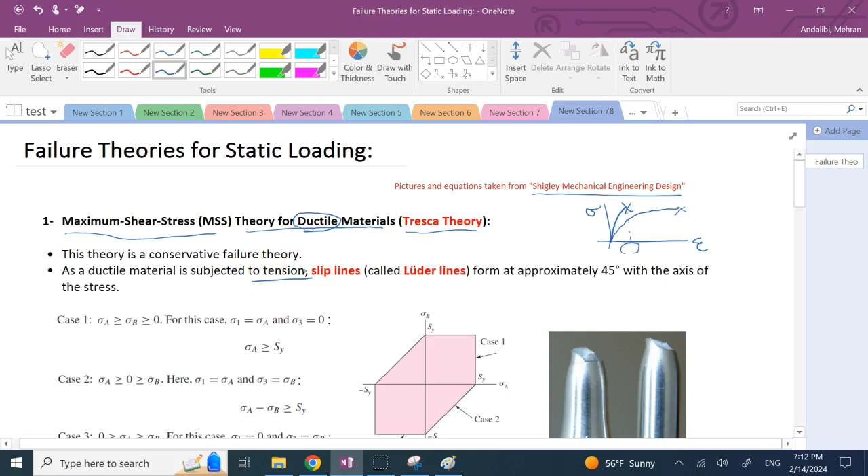For this material, it has been shown that when you put it under tension - if you have a specimen, a piece, shaft or dog bone or anything like that, and you apply tension on both sides and put it in a tension machine - you can see that the fracture lines, the angles, are at roughly 45 degrees, and the material starts to lose cross-section in the middle.

So it goes like this in the middle, as you can see here on this picture on the left. The two pieces, you clearly see that the cross-section is reduced here as you move toward the middle of the part. This phenomenon we call necking.

So the necking happens here, and the angle at which the maximum shear stress is occurring is 45 degrees. If you measure the angle of this line with respect to this direction, based on theory, based on the Mohr circle, this angle is going to be 45 degrees. Along that angle is what you see the slip lines, or you might call it the Lüder lines, which happen at that angle.

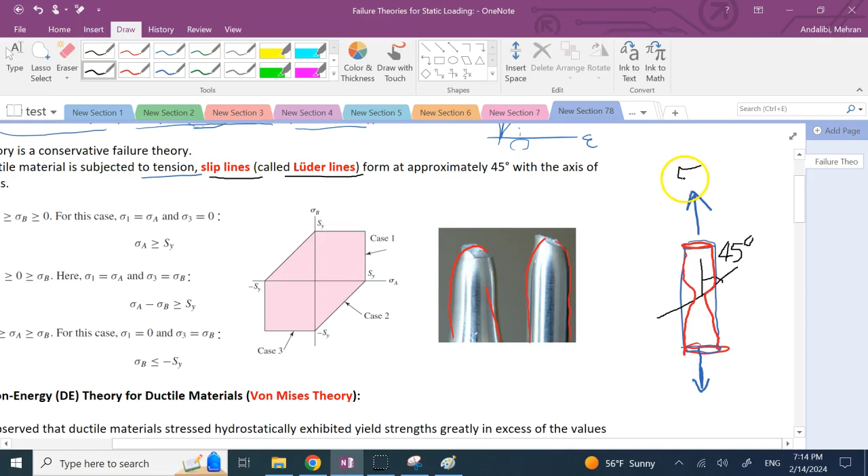And this is completely justifiable by the Mohr's circle. If you look at the Mohr circle, in the case where you basically have only sigma x, so it's uniaxial, that's all you have - there is just sigma x, nothing else.

If you draw this axis for sigma and this axis for tau, then you have one point here on this plane that is perpendicular to the x direction. You only have sigma x and zero tau, so you get this point. Sigma y is zero in this case, so sigma average is half of them. This is going to be the center of the circle, and the circle will basically be something like this.

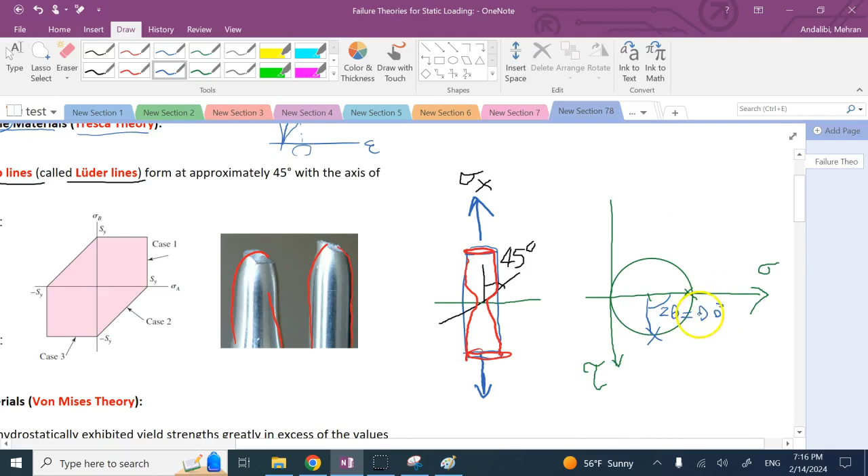And in this case, the maximum shear is of course happening on this plane, and the angle you have here is 90 degrees. But remember, in the Mohr circle, this angle is 2 times the angle of the major plane. So since that 2 theta is 90 degrees, the angle should be 45 degrees. So as I said, by Mohr circle, this is completely predictable.

And if we want to draw it in general based on the principal stress, what area is going to be the failure area and what area is going to be the safe area? The shape of the failure and safe region, if you look at the safe region, is going to be this hexagon, where the axes are sigma A and sigma B, the principal stresses on the plane. So this is for a planar case - these are all assuming 2D cases.

Okay, but for the sake of the Mohr circle, remember in general you have 3 sigmas: sigma A and sigma B, or sigma 1, sigma 2, and sigma 3. Here it assumes in scenario 1 that the 2 planar stresses, sigma A and sigma B, the max sigma and the min sigma, are both positive. So what are sigma A and sigma B?

In case of 2D, for the Mohr circle in general, let me show you on this graph. This is the sigma axis, and this is the tau axis, and this is the Mohr's circle. If you look at the 2D case, this point here on this side and this side are the min and the max for sigma. We assume the bigger one is sigma A, the smaller one is sigma B. So this is sigma A on the plane, and this is sigma B.

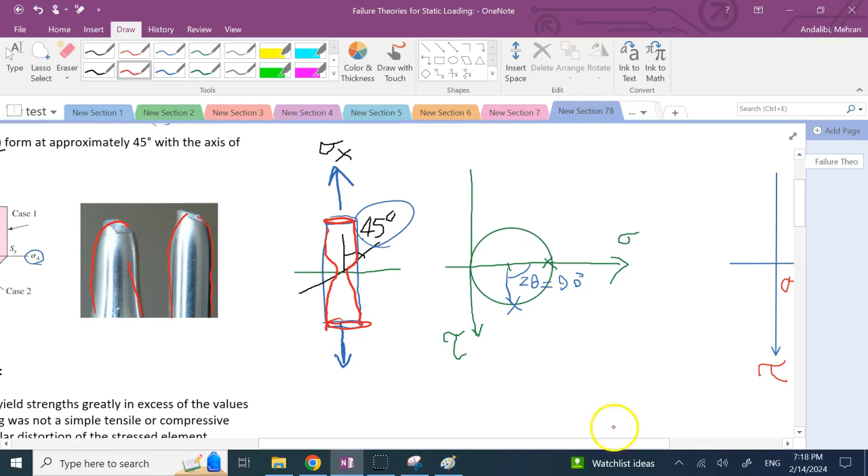And sigma 3, the third one, is 0 in this case. So your third one is going to be here. Therefore, the total Mohr circle, which is for the general 3D case, has sigma A as your sigma max, and 0 as your sigma min. The minimum is 0, and the maximum is equal to sigma A. In notation, I call them sigma 1 and sigma 3 instead of max and min. So your total Mohr circle should be passing through these 2 points, something like this.

So what is the maximum tau in this case? That's what you care about. Remember, in this method, failure would happen when the shear stress passes the maximum shear in the material. Let's add that here since we didn't specifically talk about it earlier.

This method says that failure happens when the max shear stress passes or exceeds the max shear strength of the material. So as long as the max shear stress passes the max shear strength of the material, you can expect failure.

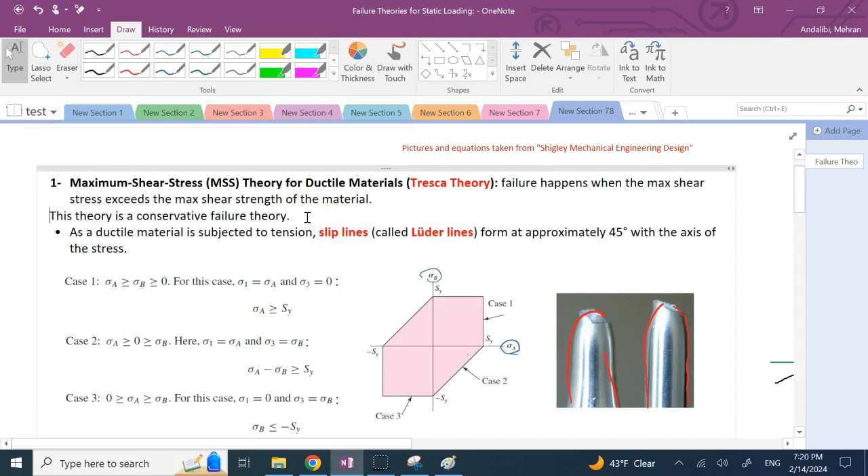So what is the max shear stress? What is the max shear strength? Let's look at those scenarios. The maximum shear stress is going to be the radius of the circle, which is the difference between sigma A and 0, or half of sigma A. So tau max is simply sigma A minus 0, divided by 2.

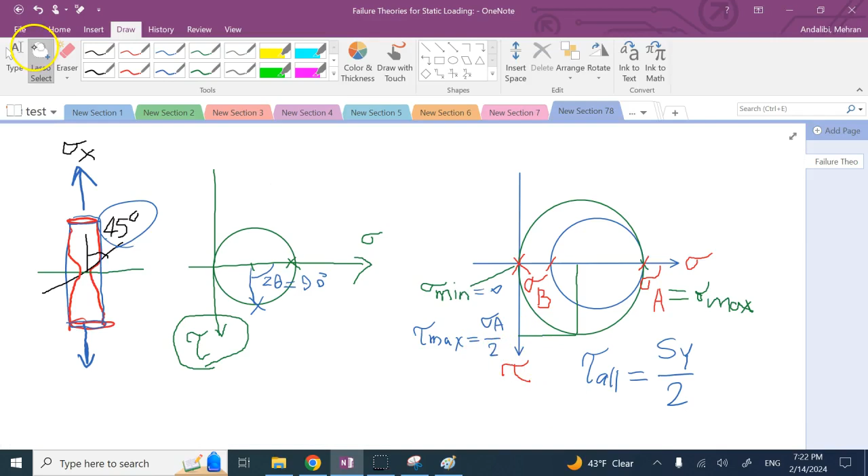Now, what is the shear strength? What is the maximum shear that the material can have? What is the tau allowed? This is equal to the yield strength of the material divided by 2. As long as this tau max is less than that strength, you should be good. So if this is less than that, you have no failure. And you can get rid of the 2's.

So you see sigma A, the maximum stress in the plane, should be less than the shear strength, the yield strength of the material. As long as sigma is less than Sy, there is no failure. Once sigma A exceeds or equals Sy, then it is failure.

And this is for the case that both planar stresses exist and they are both positive. If you draw this plot with sigma A on the x-axis and sigma B on the y-axis, that is the first quadrant. In the first quadrant, both numbers are positive, so the bigger one of the two, sigma A, should be less than Sy. If this number is Sy and this number is Sy, then if sigma A is bigger, sigma A less than Sy means to the left of this line, and if sigma B is bigger, sigma B less than Sy means below this horizontal line.

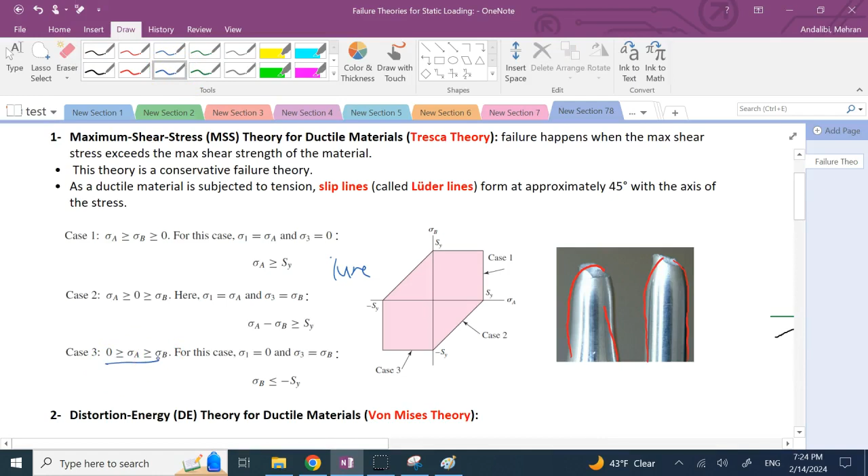Scenario 3 is similar to scenario 1. In this case, both of them are negative. Okay, in this case, your Mohr circle moves to the left. So instead of this here, now both of them are on this side. So one is here, and one is 0.

Okay, so this is 0. And in this case, it says sigma A is bigger than sigma B, but they are both negative. So your sigma A is here and your sigma B is here. So your Mohr circle, in this case, has to go like that. And again, your tau maximum, in this case, is equal to sigma B minus 0, or 0 minus sigma B, divided by 2.

Okay, and this is the tau max that you have, and again, this should be what? This should be less than or equal to Sy over 2, and from here you see that sigma B has to be basically bigger than negative Sy, right? For in magnitude, the magnitude of it is less than that, the value of it is bigger than that. So that is this scenario here, which you can see.

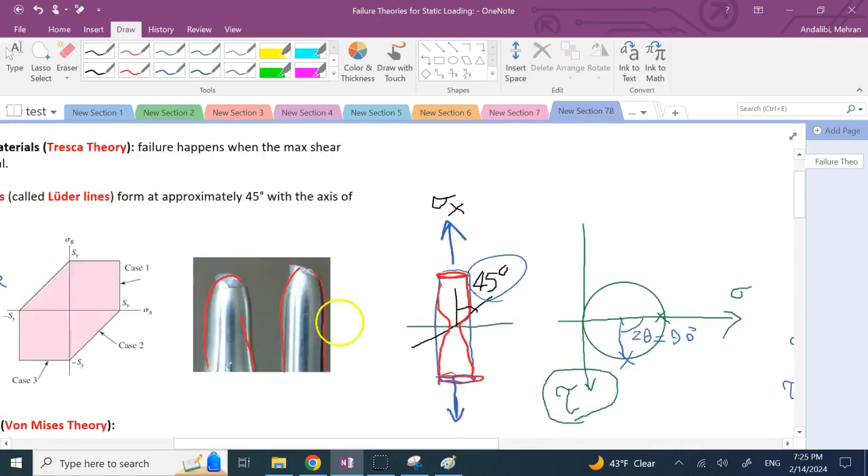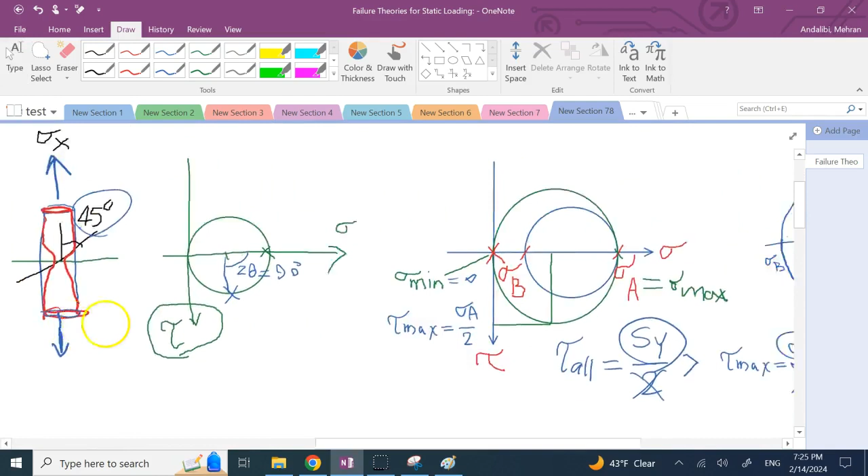Now failure is opposite of that. You can see again, if sigma B is less than negative Sy, which means basically on this side, so if this is negative Sy, if your sigma B is less than that, means here. If it's more than that, means to the right of it. Okay, so this is the, and we can use bigger than. This is the no failure case, and opposite of that is, which is what you can see here, that is the failure case again.

Right? So again, if you want to be safe, you have to be bigger than negative Sy. So for sigma B is above this line, for sigma A is to the right of this line, so that means this area here. So in the third quadrant, again, you stay inside the circle, inside the square. In the first quadrant, you stay inside the square.

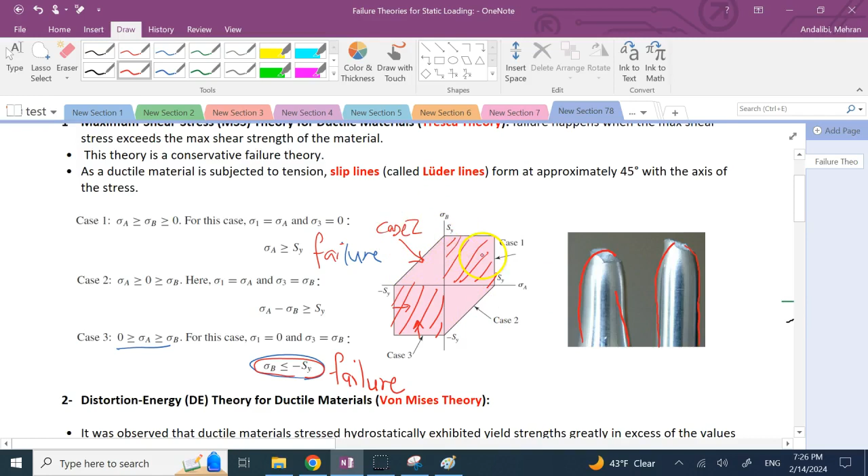Now, in case 2, which is either here or here, they are both case 2, in the second or the fourth quadrant, where the sign of sigma A and sigma B are different. So one of them is bigger than 0, the other one is less than 0. In this case, the Mohr circle is going to be like this. So your sigma A is here, your sigma B is here. And your third sigma is here, again 0 because it's a planar case. In this case, the Mohr circle is going to be like this.

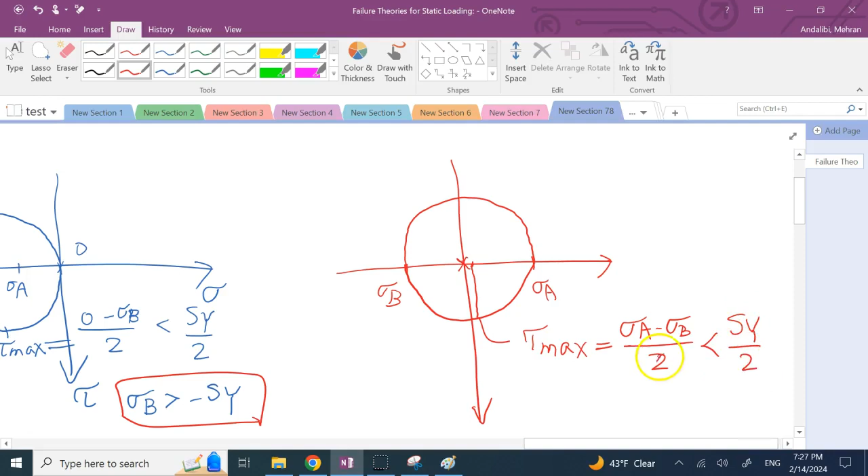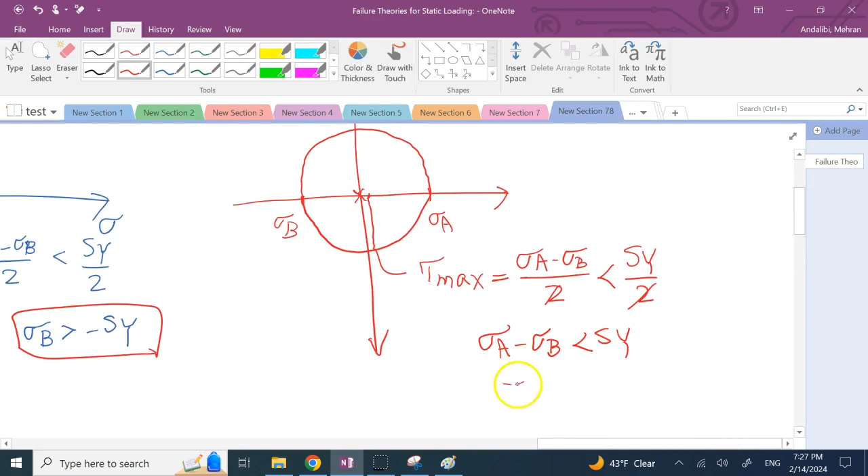And if this is the center of it, then this tau max in this case is sigma A minus sigma B divided by 2, which should be less than tau allowed. And tau allowed, if you remember, was Sy over 2. Again, if you get rid of this, you see that sigma A minus sigma B has to be less than Sy. And clearly, or you can say sigma A has to be less than sigma B plus Sy. And if it's equality, that's clearly the equation of a line with the slope of 1 in the sigma A, sigma B plane, with this guy to be your y-intercept or x-intercept in this case, right?

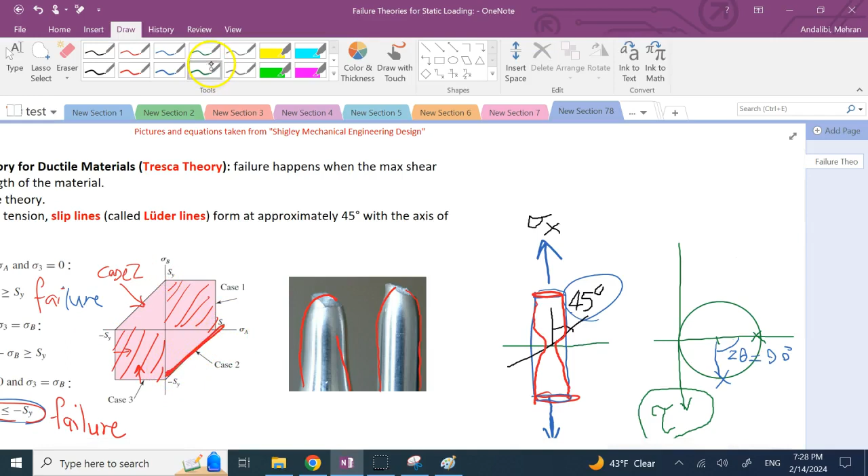So that is clearly this line. And when the sigma A and sigma B switch in terms of sign, or sorry, this guy, it's this one. And when sigma A becomes negative, sigma B becomes positive, then the only change is when these two switch, then this becomes sigma B minus sigma A. So this becomes like that, okay? And that changes the line to this one.

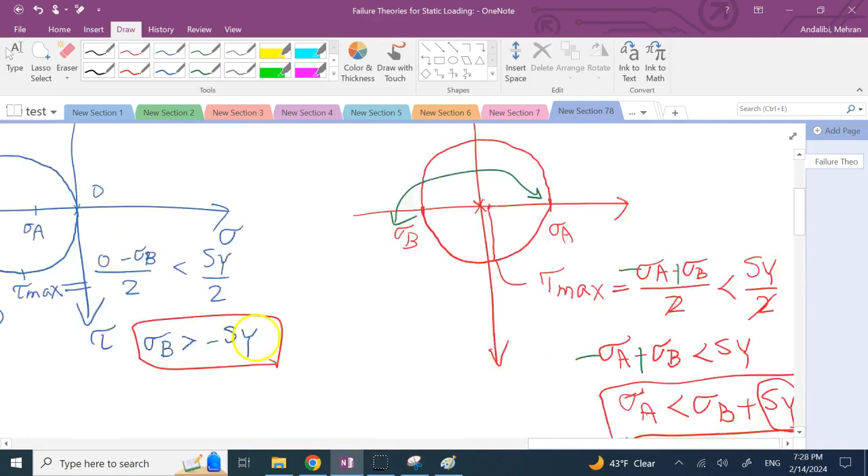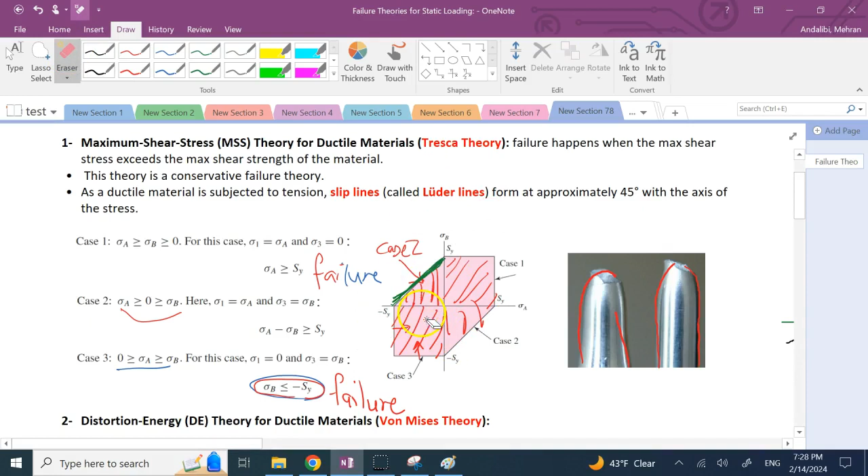So as long as you stay inside these shaded areas, this one and this one, you are safe. So you see, that's why the shape of the safe region in the Tresca method is this hexagon that you can see. Okay, this is what we call the maximum shear stress theory, or the Tresca theory. And that is based on the Mohr circle, which you can clearly see.

Now, this method is a conservative method. What does it mean? It means the value that it predicts, the safe region that it predicts for failure, is typically less than what it should be. Okay, the values of stress that it predicts failure happens, these regions are typically below the reality.

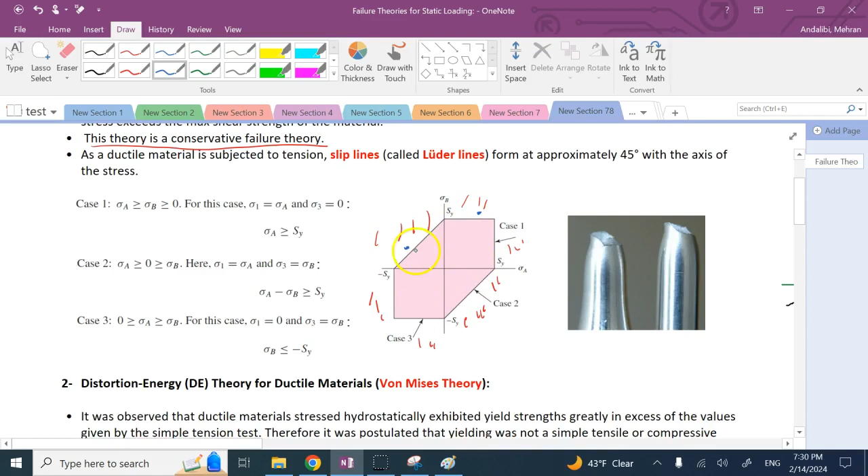What does that mean? It means that in reality, it was observed that there was a point of sigma A and sigma B outside this hexagon, which based on this method means failure, but in reality they found it didn't fail. There was a point where the status of the stress is outside this hexagon, so there should be failure, but they saw that the failure didn't happen. So they found that the fail-safe region this method gives you is smaller than reality.

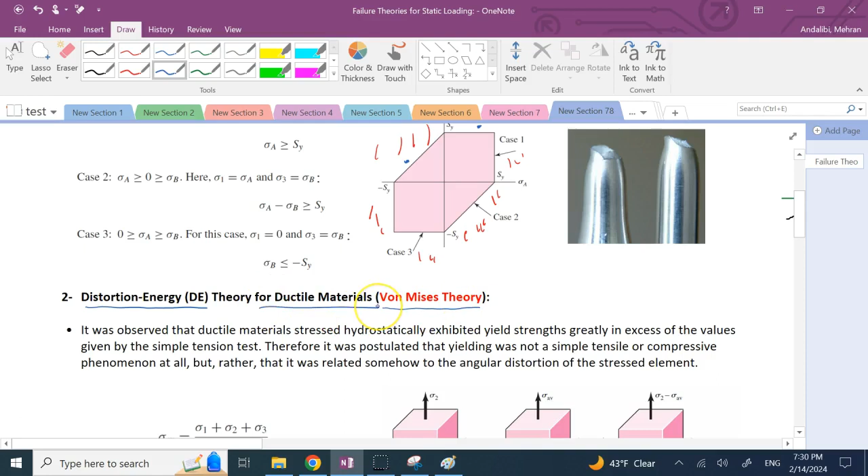In reality, even a little bit outside this hexagon, you still should be safe and no failure happens. That's where the second method, the distortion energy method, came into existence, which is also called the von Mises theory, and this is also for ductile material. What does this method say? Let's take a look at this observation.

One of the things also seen in this observation was, if you have ductile material and you stress them with hydrostatic stress, their yield strength was more than what it was in tension stress. What is hydrostatic? Hydrostatic means the stress in all three directions, x, y, z, is the same value. So if sigma x equals sigma y equals sigma z from all directions, then we call it hydrostatic.

What does it have to do with hydro and static? That's because if you have an object inside a fluid, water or something, and you drop an object inside of this, which is small, at all these different angles, as long as the dimension is small, all these pressures, P1, P2 and P3, are all similar and equal to rho GH plus P0. This is the static pressure of a fluid at depth H below the surface of the fluid. So inside any fluid in a static scenario, at a specific depth, the values at different faces of any element are the same. That's why we call it hydrostatic.

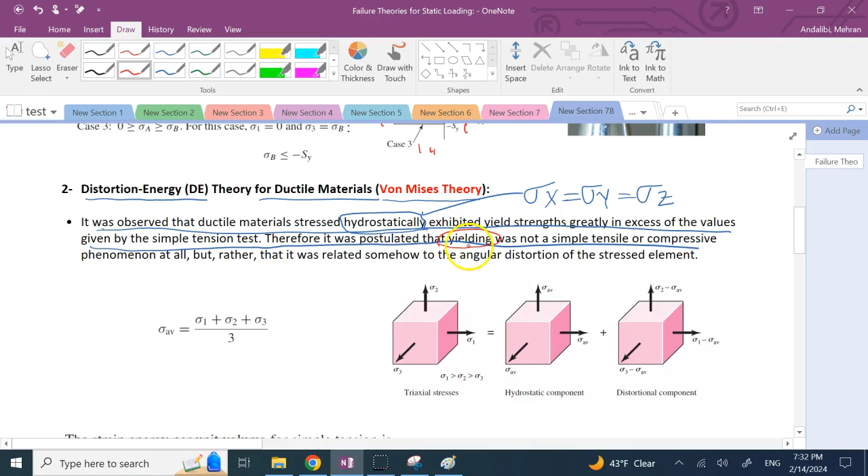Now, what was the conclusion from this? The conclusion was that not only is hydrostatic stress not messing up the shape of the object, it actually made the yielding happen outside this region. So when there was a hydrostatic case, I could have failures outside the Tresca region. So this method says it's not the hydrostatic component of a stress that has any effect on the failure. It's the other portion of the stress that causes the material to fail.

What is the other portion? If you consider any arbitrary element of the material with 3 sigmas on 3 faces, sigma 1, sigma 2, and sigma 3, not equal to each other, you can say this is equivalent to one case of hydrostatic where you have sigma average, defined by the average of the 3, applied to the element, plus the case that the stress on the other faces are sigma 1, sigma 2, and sigma 3 all minus average. You can do superposition here, saying the one on the left equals the sum of these two on the right. Now what's the effect of each one of these stresses?

This hydrostatic part is a tension stress all in the same direction, so the effect of this is resizing. This will make the material get either bigger or smaller, or change in volume. So if all the stresses are positive, the material will expand in volume. If they are all negative, compressive, the material would shrink. Like underwater, they are all negative, so the material can shrink if it's really flexible.

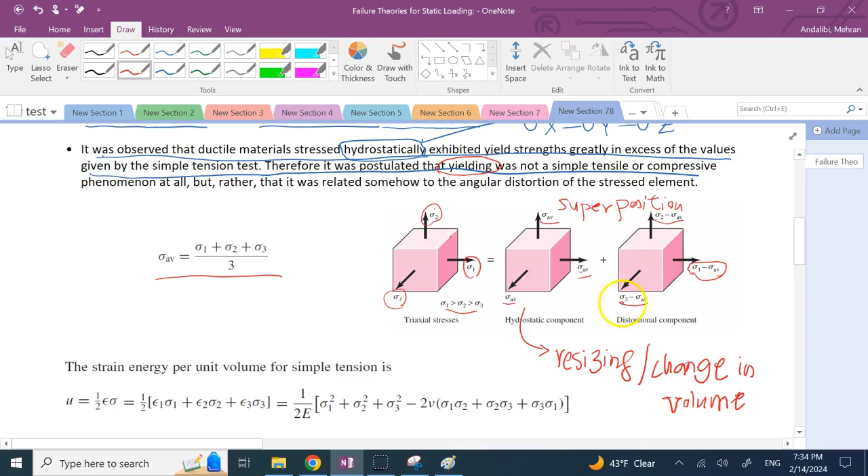What is the effect of these remaining stresses? They will cause shear in the material, or change in angles.

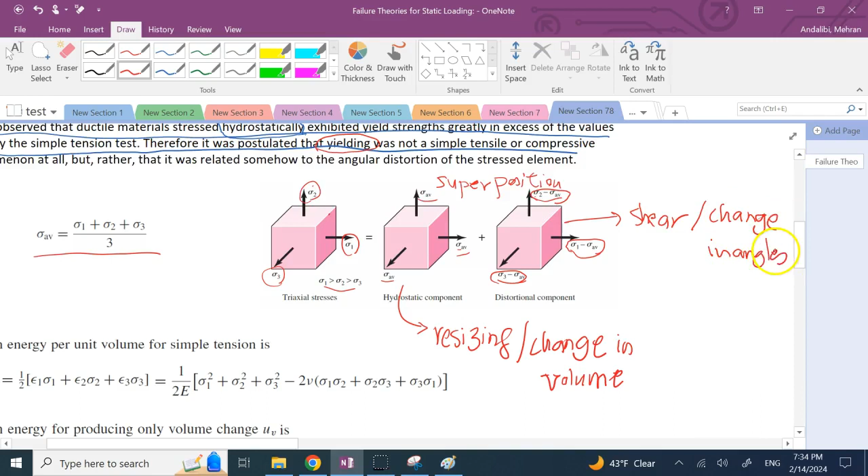So instead of making this cube a smaller cube, as we had in the previous case of hydrostatic, here they can't make it smaller or bigger. In this case, they're going to ruin the angles. They can change the angles and create shear stress.

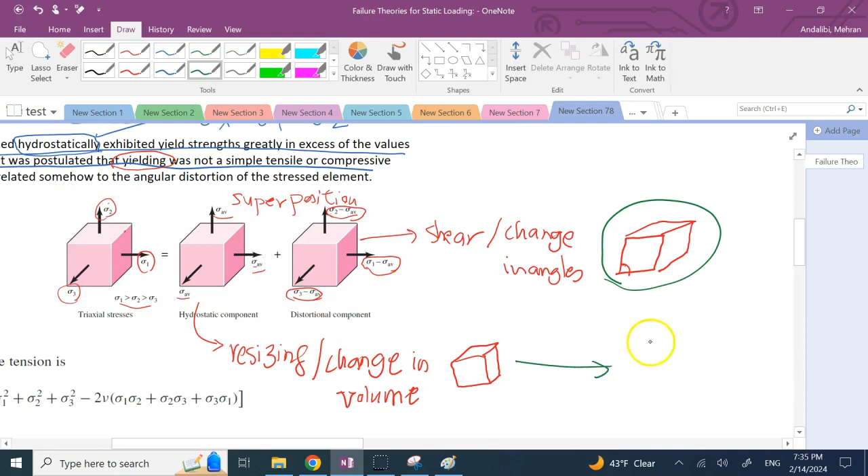But how big should these shear stresses or the deformations be before the material fails? In the previous case, it was simple. We said when the max shear stress exceeds the max shear strength of the material. But what about this case? What does this method say? It says that...

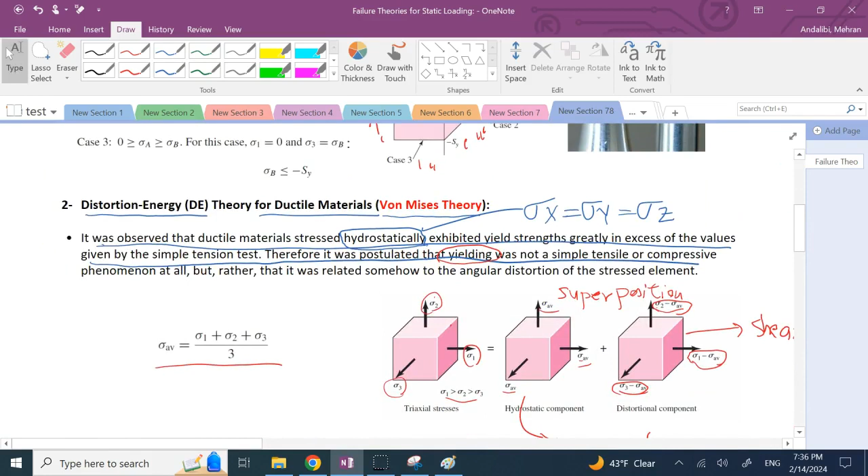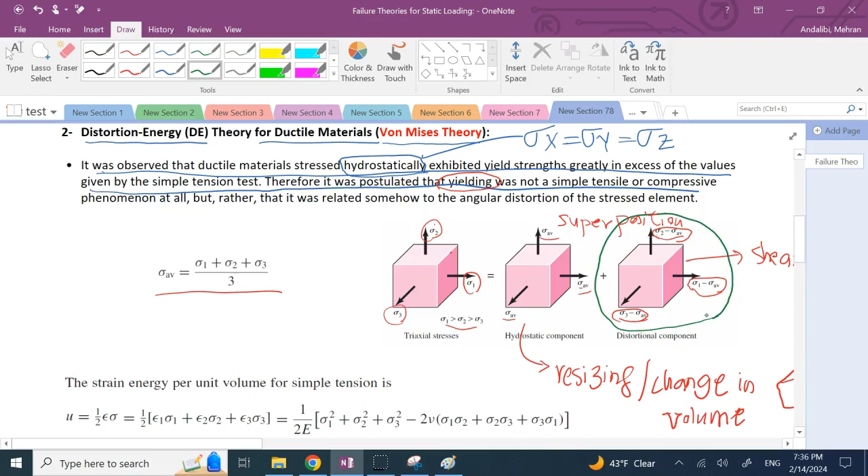We calculate energy. We calculate the distortion energy for this scenario, to see how much distortion energy this one will have. Then we compare it against a uniaxial case, like this case here, when the material is under uniaxial stress. We calculate how much distortion energy this case has until it reaches the yield strength. Then we compare and set those two distortion energies equal for this uniaxial case and this general 3D case, the same, and from there we should be able to find a formula for failure. So let's see how this method works.

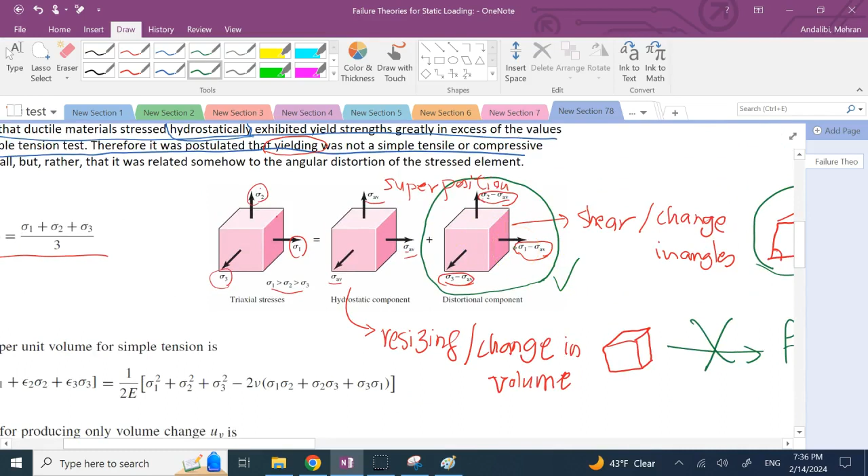It calculates the strain energy, the energy of distortion, per volume for a simple tension. If you only have a simple tension, it is going to be 1/2 epsilon times sigma, and again it's per volume. So this is the total energy per volume of the material. You can show that it is 1/2 times epsilon, this is epsilon, times sigma.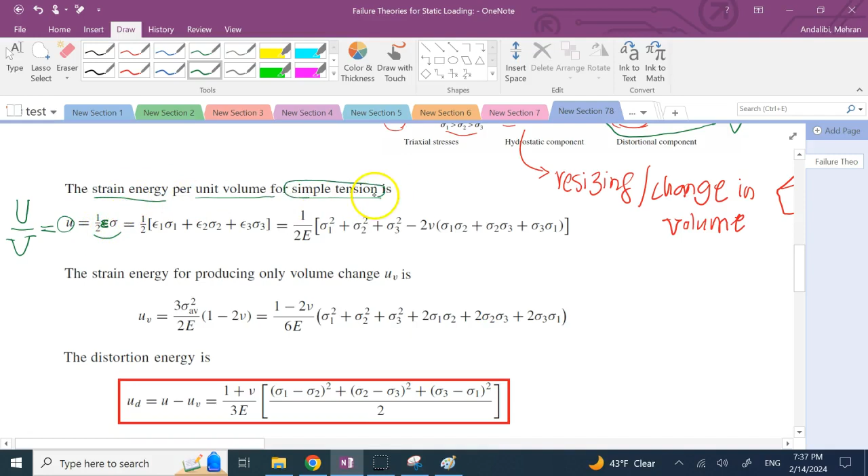This is for a simple tension case, right? It's this guy here, 1/2 epsilon sigma. Now if it's three-dimensional, so you have sigma 1, sigma 2, and sigma 3, this one is for the 3D case, then it is going to be 1/2 times epsilon 1 sigma 1 plus epsilon 2 sigma 2 plus epsilon 3 sigma 3, right?

And you know that these epsilons are related to the sigmas through what you know from solid mechanics. You know that, for instance, epsilon 1 is sigma 1 over E minus nu times sigma 2 and 3 added, so it's going to be sigma 2 over E plus sigma 3 over E, where this nu is the Poisson ratio and this E is the Young's modulus, right?

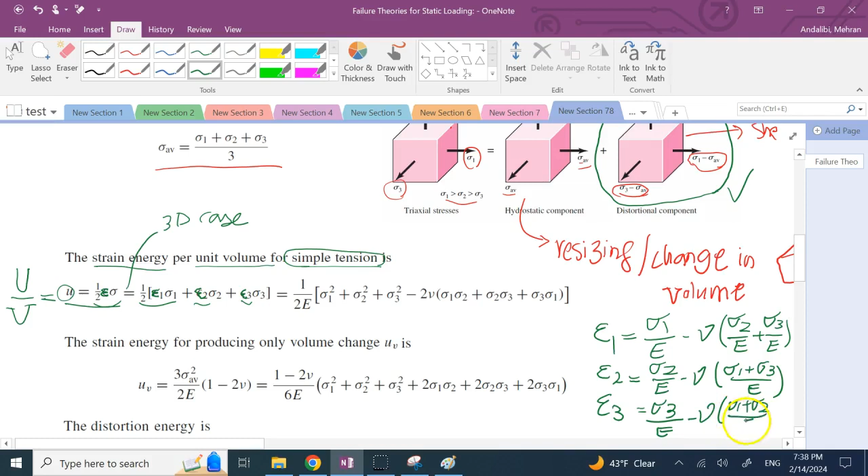And similarly you can write a similar formula for epsilon 2 and a similar formula for epsilon 3. So this guy is like sigma 2 over E minus nu times sigma 1 plus sigma 3 over E, and this one is like sigma 3 over E minus nu times sigma 1 plus sigma 2 over E. So if we plug in these three right up here and simplify, you get this term here on the right.

You get this guy. You can easily show that. And clearly you see nu is there, E is there, and all the principal stresses. So this formula is the total strain energy for the 3D case. But not all of this energy, as we learned, is used for shear. Some portion of it is the energy just for resizing. The rest of it is the energy for what?

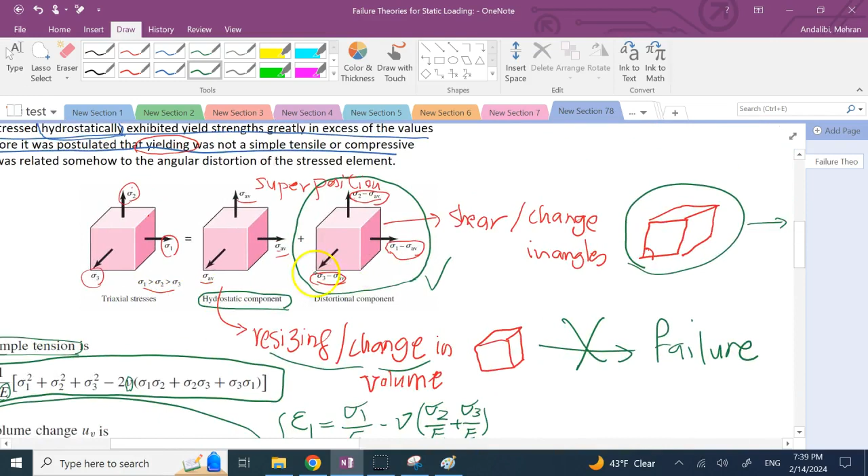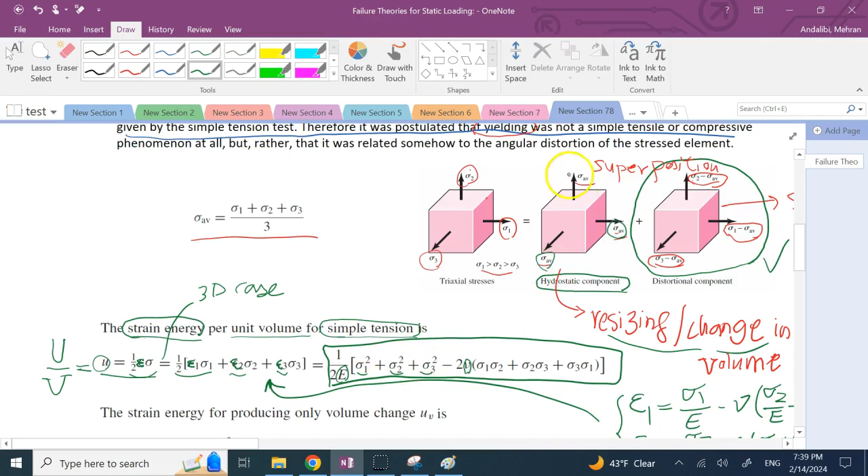For distortion. So how much of it is the energy for hydrostatic resizing? Well, in that case, we have to set all three sigma 1, 2, 3 to be equal to sigma average, which is this guy. If we plug that in, then for change in volume you get this formula here. So here we plug in sigma 1 equal to sigma 2 equal to sigma 3 equal to sigma average. You get that one, and if you plug in this formula for sigma average, you get this guy.

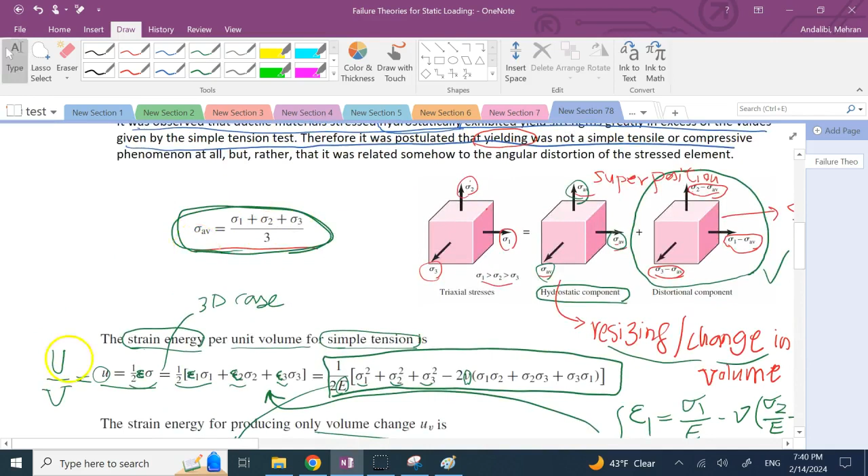Now that was the total strain energy. If I subtract this UV from U, then you get U distortion. So you get the strain energy for the shear case, and that is basically the first line minus the second line, and you get this. So this is the total distortion energy per volume, which is only for shear, only for distortion.

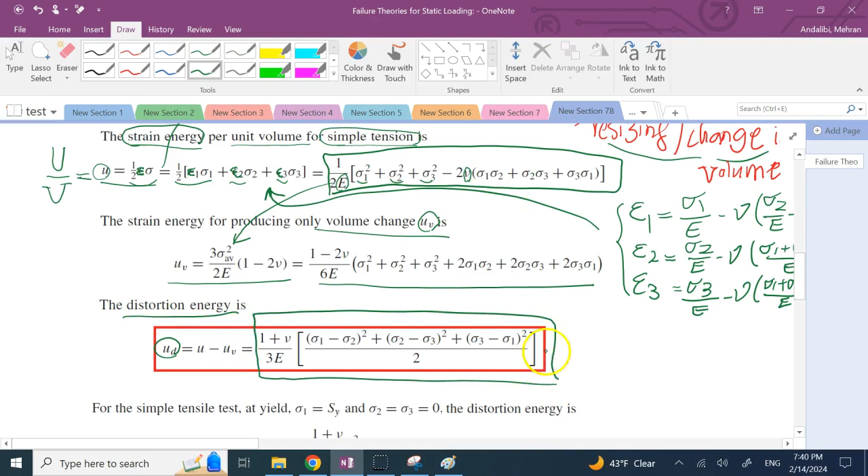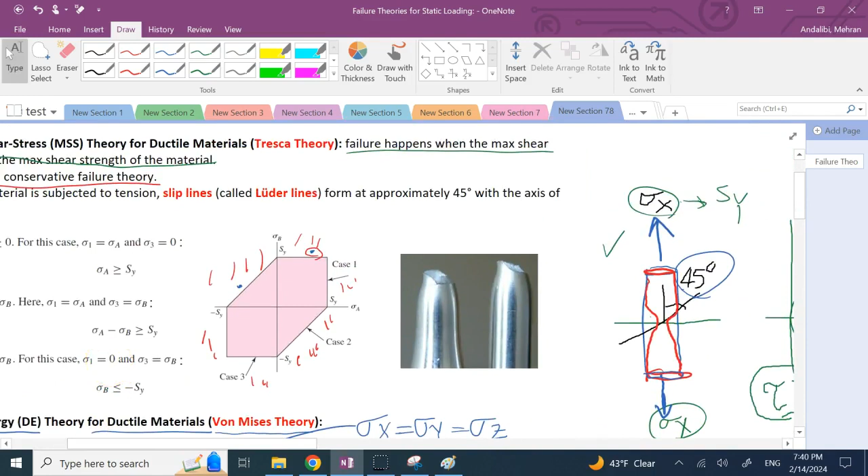Now we have to go and look at the single uniaxial case here and see for this uniaxial case, where sigma can go up to Sy, how much is the strain energy, how much is the distortion strain energy. So in that case, sigma 1 is equal to Sy, as we said it can go up to Sy. Sigma 2 and 3 are 0 because it's uniaxial. So if we plug sigma 2 equal 3 equal 0 and sigma 1 equal Sy into this UD formula, you get this.

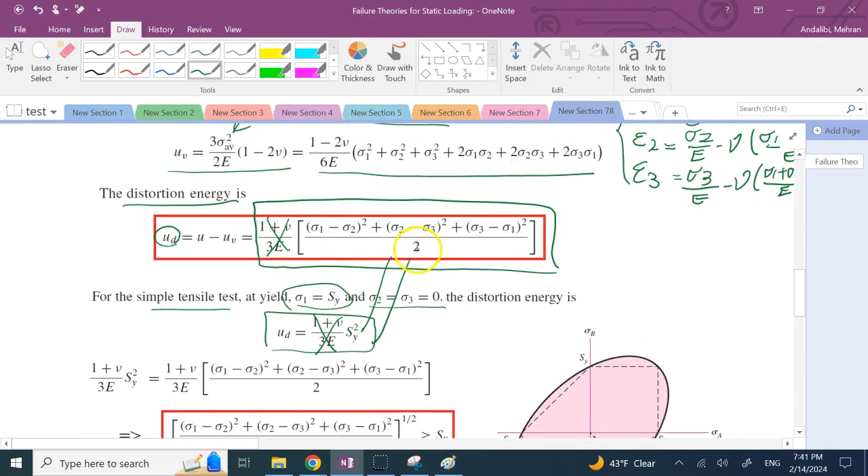Okay, now if we say these two strain distortion energies are equal, then the constant term in both of them can be eliminated, and you get this formula. You divide both sides, take a square root from both sides, and you get this formula, which says: as long as this square root of sigma 1 minus 2 squared plus 2 minus 3 squared plus 3 minus 1 squared, the whole thing divided by 2 - if this square root is bigger than or equal to Sy, that means failure. And if it's less than Sy, then it means no failure, or safe.

By the way, this whole square root thing, we can give it a notation. We typically call it sigma prime, or sigma Mises. So another notation for this is sigma Mises, and this is what you see in many software packages that do finite element analysis. One of the major stresses you see in them is the Mises stress - that is this square root calculated for you. So first they calculate all three sigmas, sigma 1, 2, 3, from the Mohr circle, the principal stresses, and then plug them here to get one equivalent number. Because here we have three sigmas, we cannot compare each one of those three sigmas with SY.

We have to combine them into a single number, then compare it against SY, and this is what Professor von Mises came up with. Now, in the sigma A, sigma B plane, clearly that's an ellipse. Why? Because in this case sigma 3 is 0, so it's a 2D case. So if sigma 3 is 0, what would you get? The equation becomes, as you can see, sigma 1 minus 2 squared plus sigma 2 squared plus sigma 1 squared, basically. Or if you write it, it's going to be 2 sigma 1 squared plus 2 sigma 2 squared minus 2 sigma 1 sigma 2, divided by 2.

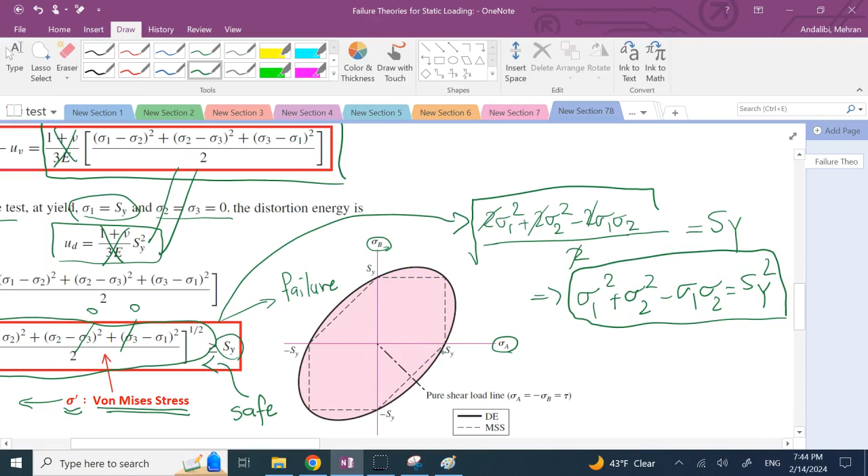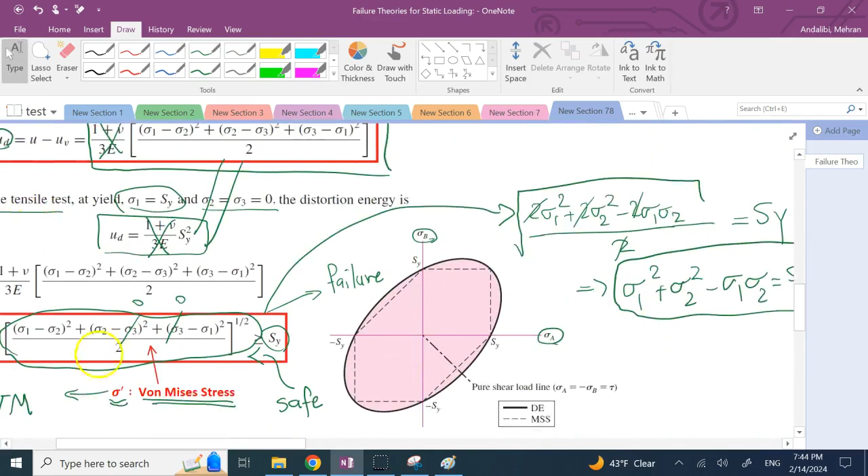An interesting thing about this ellipse is that if you draw the Tresca region, that hexagon of Tresca, it falls right inside this ellipse, with the corners of it, which are SY and negative SY, being right on the boundary of the ellipse. So this method says not only is inside Tresca safe, actually all of these regions that I'm going to paint in blue are also safe, because these are the regions where the strain energy does not surpass the one for failure, since a portion of it is used just for changing the volume of the material, and not all of it is used for distortion and shear.

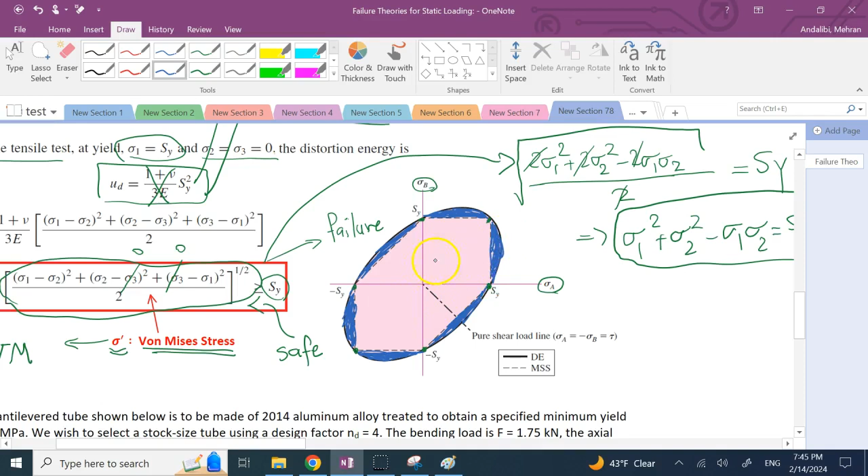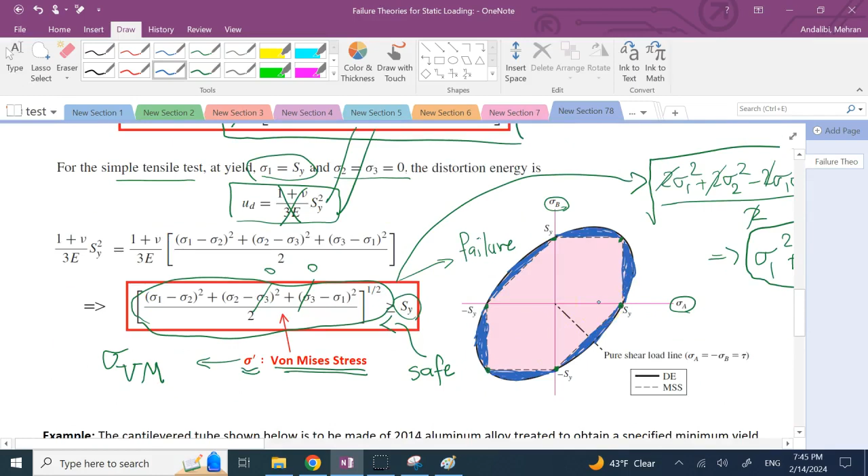So the Tresca gives you a smaller region compared to the von Mises. That's why we call the Tresca method a conservative one, because it does not allow too much motion outside this hexagon, but von Mises gives us a little bit more wiggle room. So this was the von Mises stress, or the distortion energy.

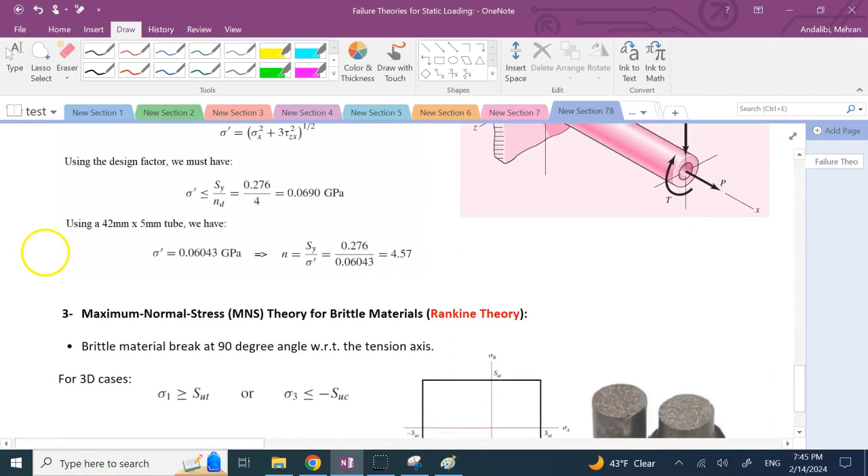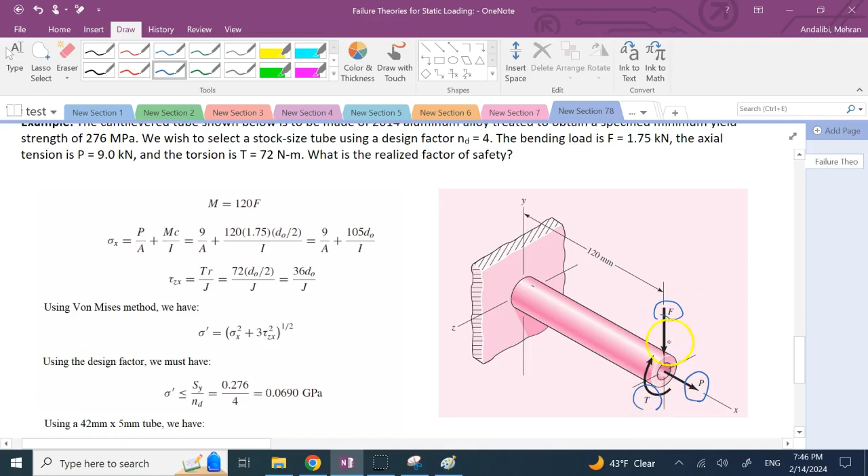Finally, let's go to an example before we look at maximum normal stress. So here we have a cantilevered beam, a shaft which is hollow, and there are three forces on it: a bending force F, or shear bending, an axial force P, and a torque T. So each one of them creates a stress, and it is a combined stress scenario. The values are given - F is given, the axial load is given, the torque is given - and we want to pick a geometry, a size for this, where the material is pre-selected: it is 2014 aluminum alloy.

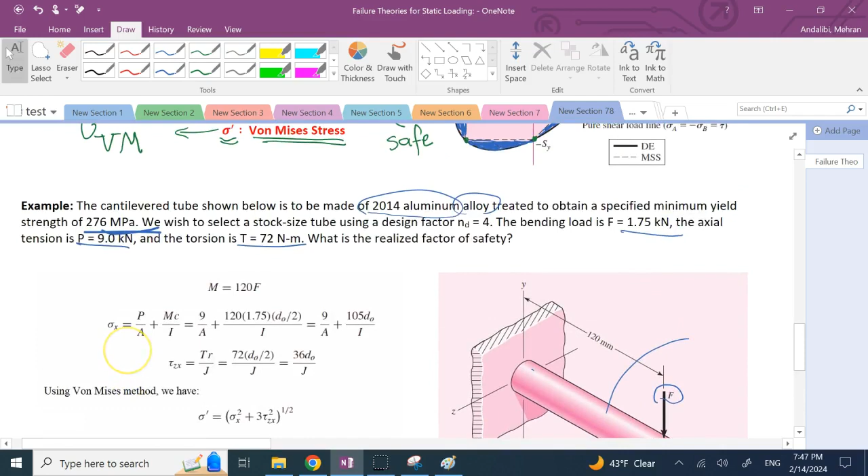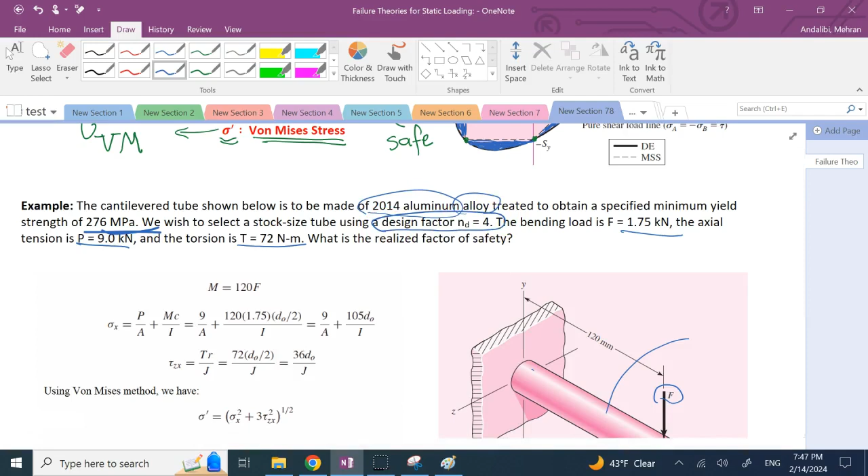Okay, and the yield strength of this material, SY, is already given, 276 megapascal. So what you need to pick here is the geometry, and you're going to pick it from the tables, because these kinds of tubes are specifically picked from standard tubes, circular tubes, and you want to use a safety factor of 4 at minimum. So what is the geometry that you would pick? Okay, let's go ahead and work on this problem.

As I said, we're going to pick this from standard size tubes, and here I copied the table from the book. You can see these are standard tubes, and the dimensions for them are given in inches, right?

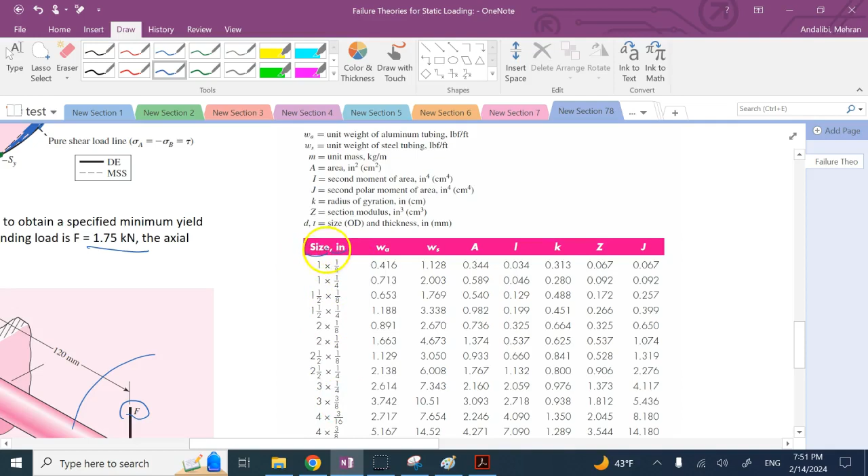This dimension, you say 1 by 1/8. What does it mean? It means that 1 inch, as you know, is 25 millimeters. So the properties here you have are: one is the cross section in inches squared. That's one, and the other two you might need for the stress case are I and J, the second moment of area and the polar moment, as you can see, this one and this one. And then you of course have unit weight of aluminum or steel tubing, so if it's aluminum, that's this one. You also have Z, which is the section modulus. So you have these different parameters here, and K is radius of gyration, which is related to I here.

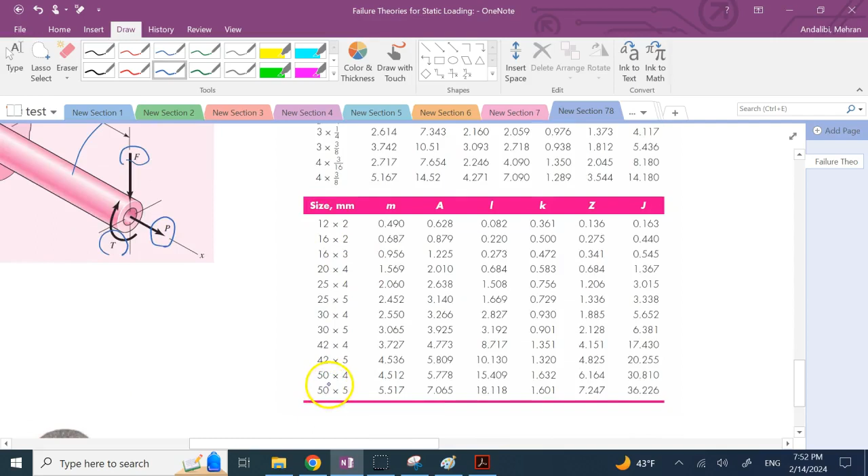Okay, so we're going to pick one of these. The top one is for inches, these bottom ones in millimeters, right? So you have these parameters, and we're going to pick one of these. Now, this is all in SI units, so I will try to pick one from this bottom side here.

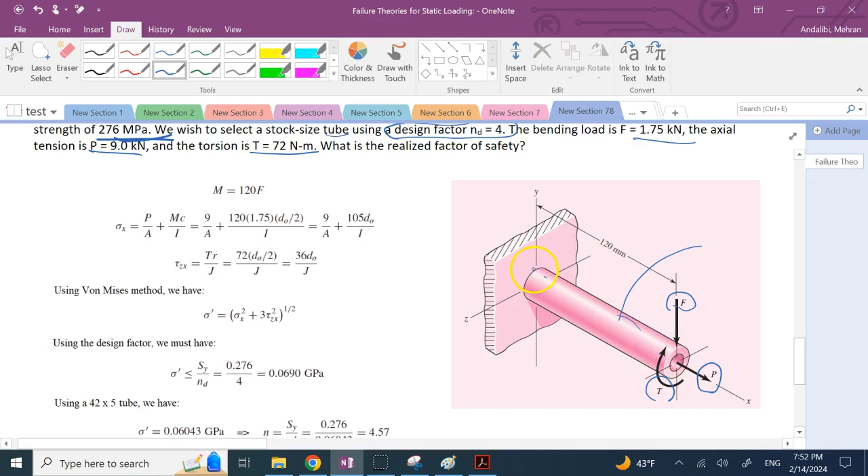So how much is M? M, of course, changes along this shaft, but the maximum M you can possibly have is at this cantilever location, at this fixed point, and that is F times 120. The unit of F is kilonewton, and this is millimeter, so when you multiply, you simply get Newton meter. So the unit of this is Newton meter, so it's 120 times F. That is the maximum moment that you can have.

Why would you pick maximum moment? Because that will give us the maximum bending stress. So what is sigma x in this case?

Sigma x is going to be a tensile stress, which is P over A, where A is the cross section, P over A plus what? MC over I. What is I? I is the moment about this axis, this Z axis, so this is IZZ, right, because the moment is about that. And C is the maximum radial distance or maximum vertical distance from that. So in this case, this C is simply the outer diameter DO divided by 2.

And here at this top point, you have positive sigma bending. At this bottom point, you have negative sigma bending. And the tensile stress in both cases is just positive. So the maximum stress is on this top point where these two positive sigmas are added together.

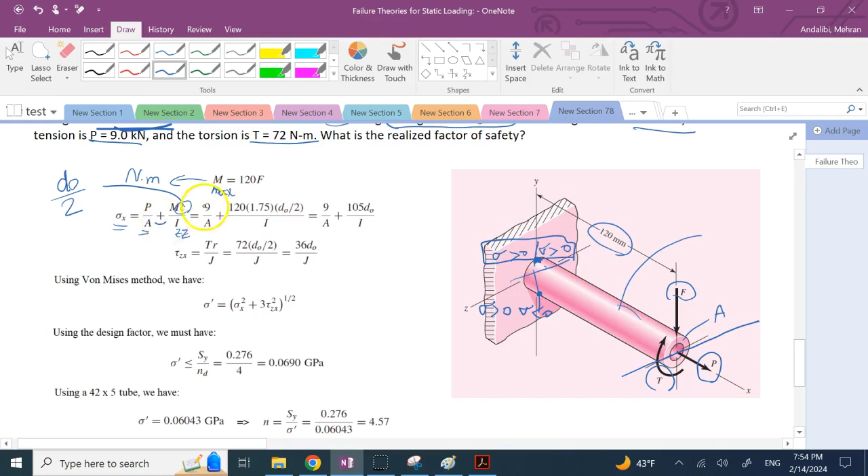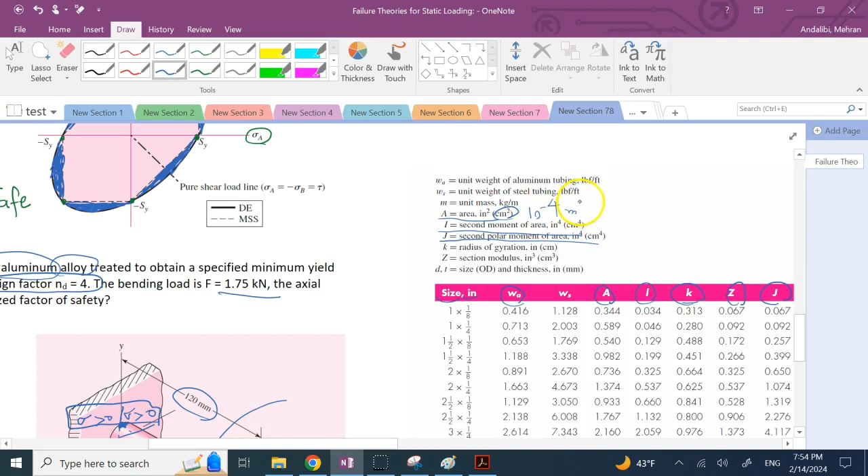Now P is 9 in this case, and again the unit is kilonewton. And the unit of A, if you look at that, is centimeters squared, right, which is basically 10 to the negative 4 meters squared. Pay attention that this is kilonewton, so the unit of that is 10 to the 7. And here you have MC over I.

So this is M, 120 times 1.75, because F is 1.75, and as I said, maximum C is DO over 2, and I here is that IZZ, which you can read off of the table. So if you write it parametrically, this is the maximum sigma x that you can have anywhere on this tube based on a parameter A, parameter DO, and parameter I. This is the maximum sigma that can happen anywhere on this shaft.

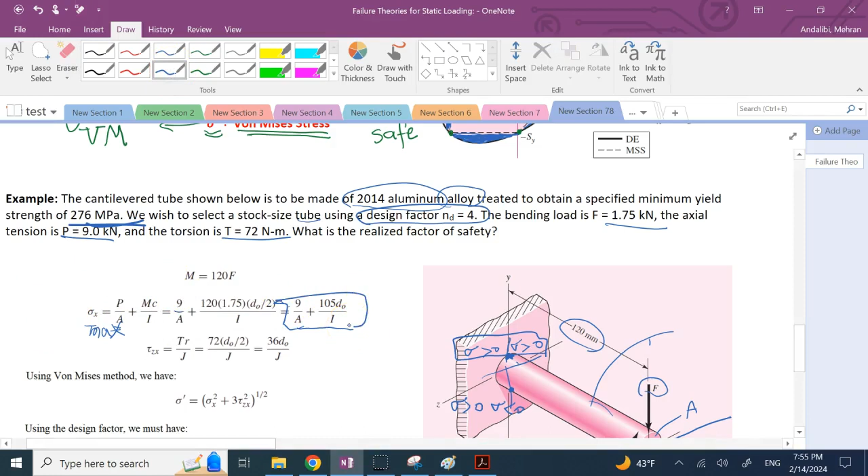What about the shear stress? The shear stress comes from T as well as F, but in this case, the shear stress due to F is neglected.

Okay, if you have this, you have to find the shear diagram, find where the shear diagram is maximum, which in this case doesn't matter. Anywhere you cut, the shear force is equal to F, and you also need to find the shear stress due to F as well as the one due to torsion.

But here the portion of the shear stress due to F is neglected. Why is that? If you remember the formula for shear stress because of the shear force, that was V times Q over I times T. V is the shear force, equal to F all over the beam, and this was maximum along this axis. So the maximum of that tau happens here on this axis.

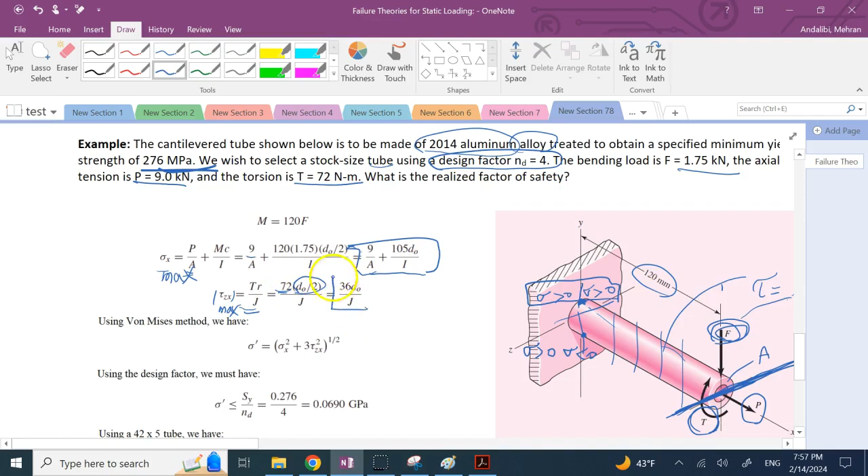The maximum shear stress due to torsion, if you remember, is TR over J, where R is the radial distance, T is the torque, J is the polar moment. The maximum of that happens at maximum R, which is D over 2, T is 72, J is given from the table. So this is the maximum shear stress due to torsion, which is basically anywhere on the circumference.

So anywhere on that circumference you have maximum tau, and this shear stress - call this tau 2, this tau 1, and these sigma 1 and sigma 2 - this tau on one of these elements is going to match the shear stress due to this, because on this element here is this way, on this element here is this way. For tau 2 and tau 1, both of them are this way. So at this point here, you have maximum shear stress.

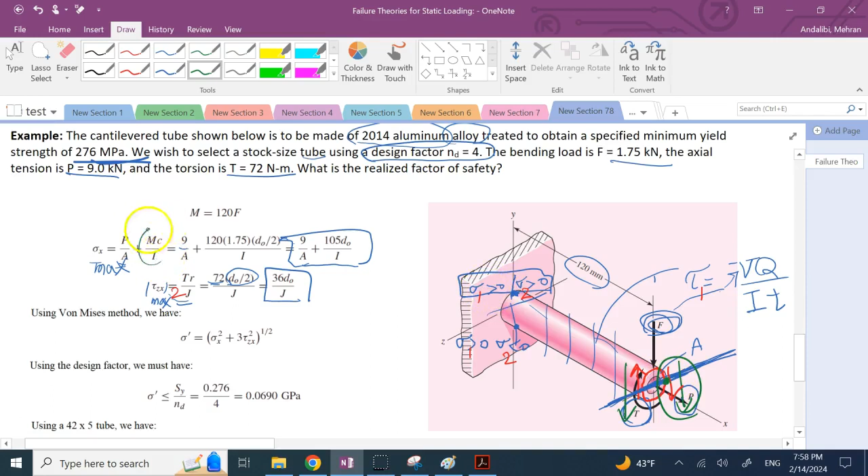But what is the problem? At that point where you have maximum shear stress, the sigma due to MC over I is going to be 0. Remember, if you call sigma 1 the bending and sigma 2 the tension, due to tension sigma 2 is all over the place, P over A - that is not going to change. But this one does depend on the distance C. So on this neutral axis, MC over I is 0.

And this value is much bigger than this guy. So if you look at where the total resultant stress, sigma and tau, give the worst scenario, it's still this point here. At that point, this value is equal to 0 because Q is equal to 0, the first moment, up there. So that one is neglected, but up here, as it's on the circumference, you still have that TR over J.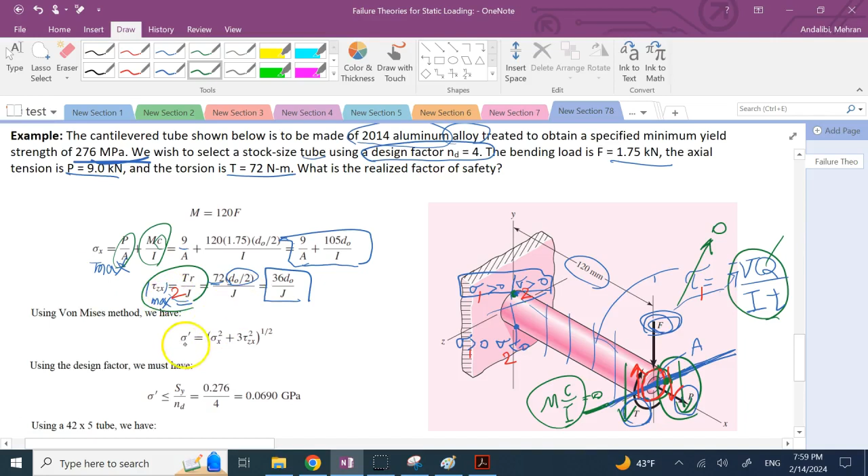So we calculate that one, and then you have to calculate sigma prime. Now sigma prime in this case - remember in this formula sigma prime is written in terms of sigma 1, 2, 3 - but in this scenario sigma 3 is clearly 0, because it's a planar case.

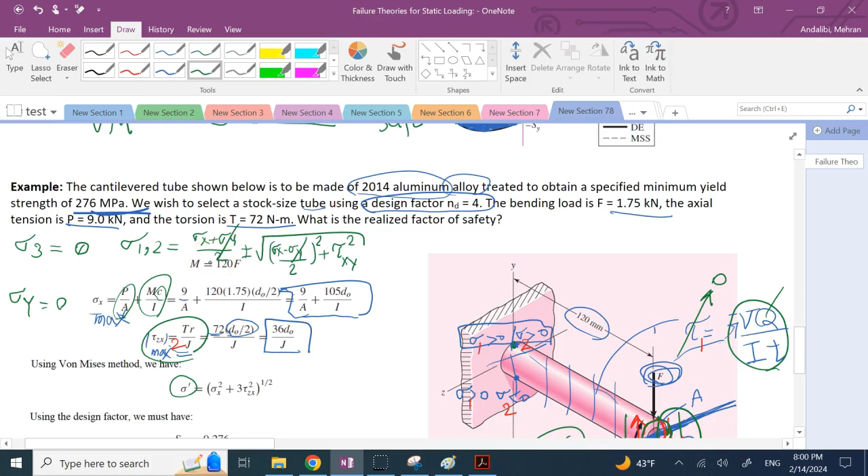Sigma 1 and 2, if you remember from the Mohr circle, are sigma x plus sigma y divided by 2, plus and minus the square root of this expression. Now in this case it's not tau xy, it's tau xz, but it was this formula here. And sigma y in this scenario is all 0, so this term is going to go away. If you find sigma 1 and 2 from this formula, as well as sigma 3, and plug them into von Mises, you can write it in terms of sigma x and tau xz. So in this case your sigma prime is going to be this expression.

This is the von Mises stress, where sigma x and tau xz are functions of geometry - you see these parameters are missing in them. Now this sigma prime, the von Mises stress, should be less than or equal to the yield strength divided by a safety factor. Remember, in the past we said sigma prime can go as high as sy.

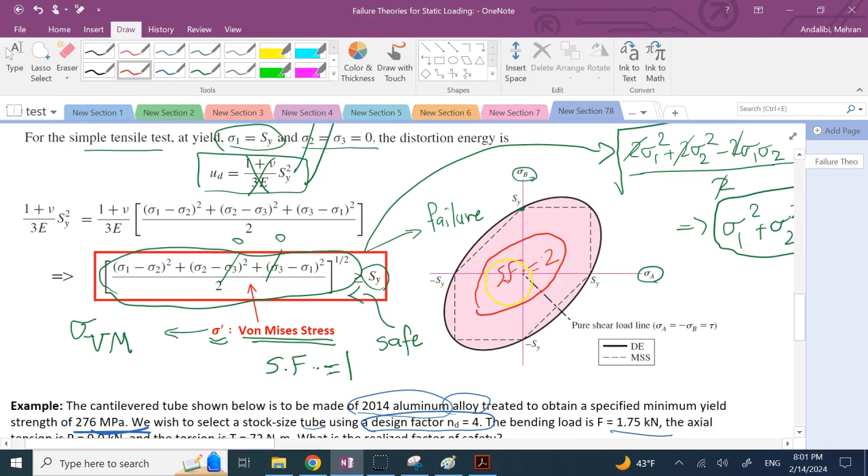So in this case, we have to divide sy by the given safety factor of 4. That means the maximum sigma prime is this number, which is basically 69 megapascal.

Now this has to be less than or equal to that. But as I said, sigma prime depends on three parameters: I, J, and DO. So what should we do now? The SY, the material was selected, the safety factor was selected, good, but the geometry was not.

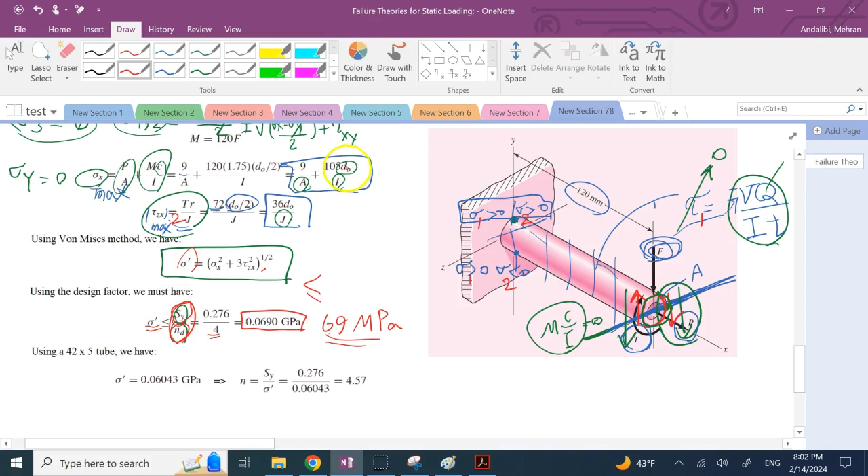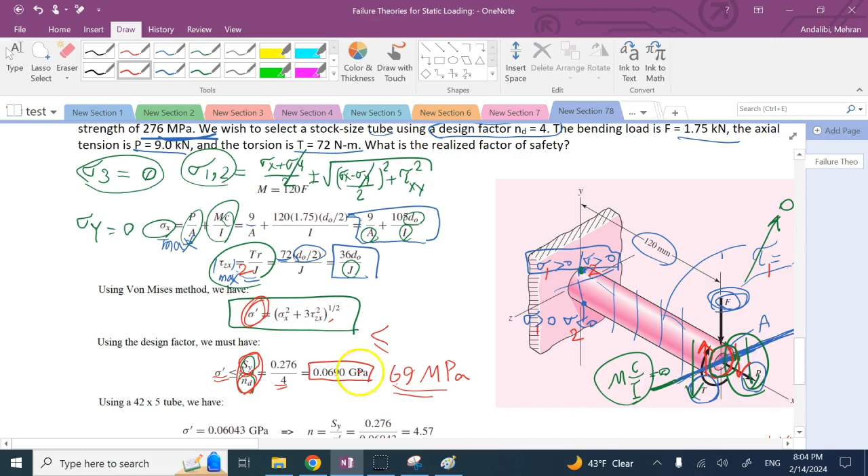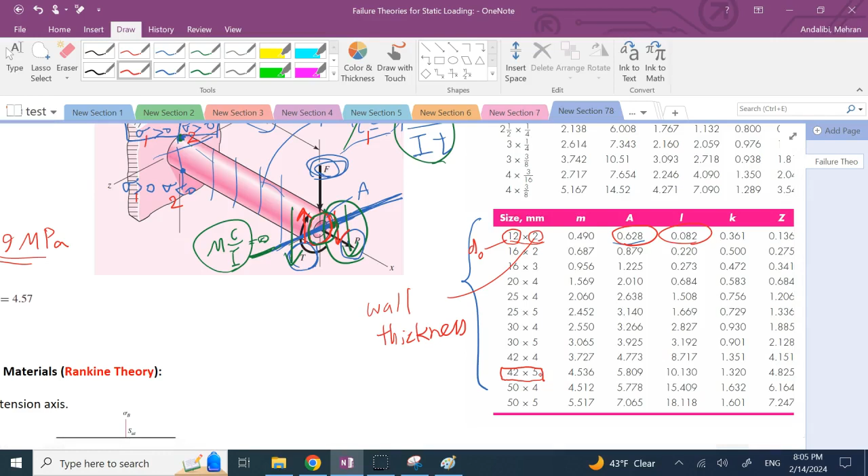If I plug these numbers in, what do I get? I get a value for sigma x and tau xz, and as a result, a value for sigma prime. Then I can check whether that sigma prime is less than 69 megapascal or not. If we go down this list, all of these tubes from the top would fail. Their stresses would be more than 69 until we get to this guy. Right when we get to this, your maximum sigma drops below 69 megapascal, and so a 42 by 5, if we use that tube, your maximum stress will be 60 megapascal.

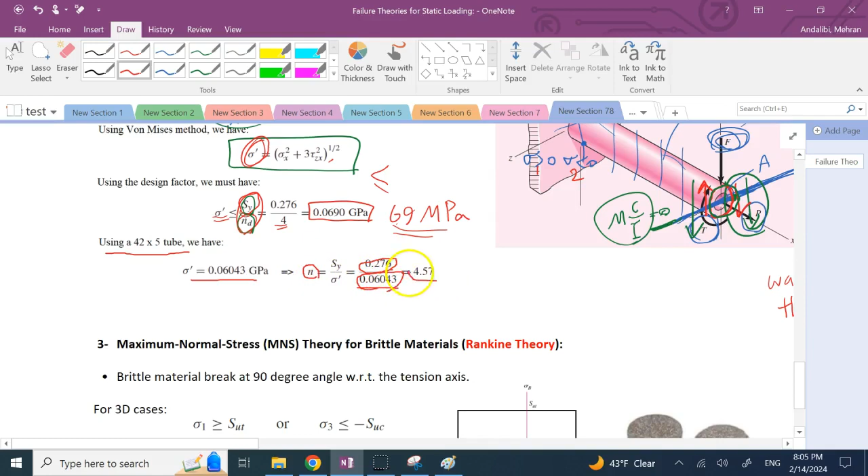And if that's the case, then your real safety factor N is going to be 276 megapascal divided by 60 megapascal. It's going to be 4.57 instead of 4. So your realized or actual safety factor is going to be more than what you wanted.

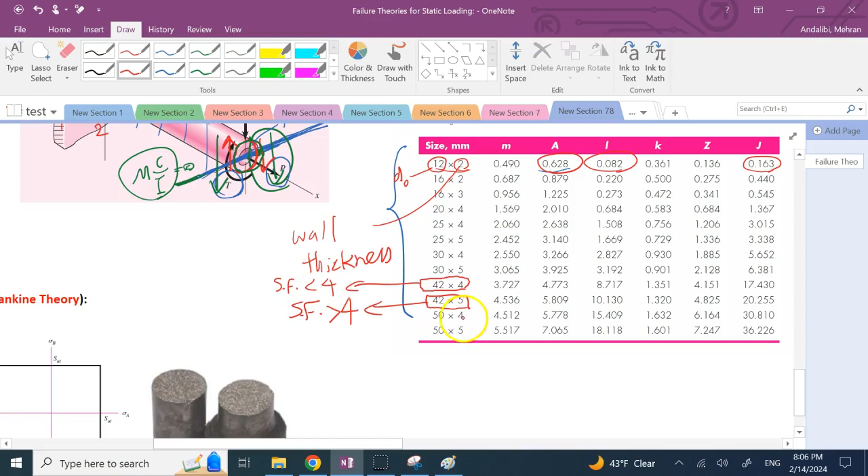Because you have a little bit more thickness material than you want. But you might not go to this one, because if you go to this, your safety factor will fall below 4 here. Here the safety factor is right above 4. Here the safety factor is still less than 4. So we have to go with this profile. We choose that, and with the material selected, we should be good to go in this case, under static loading.

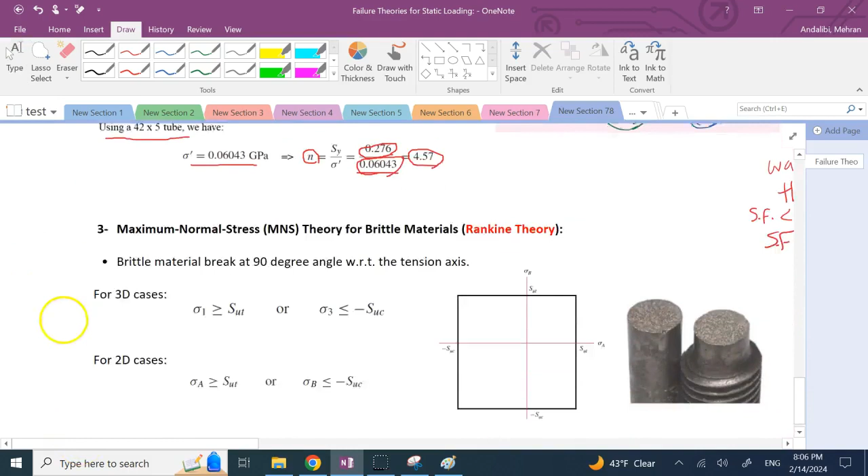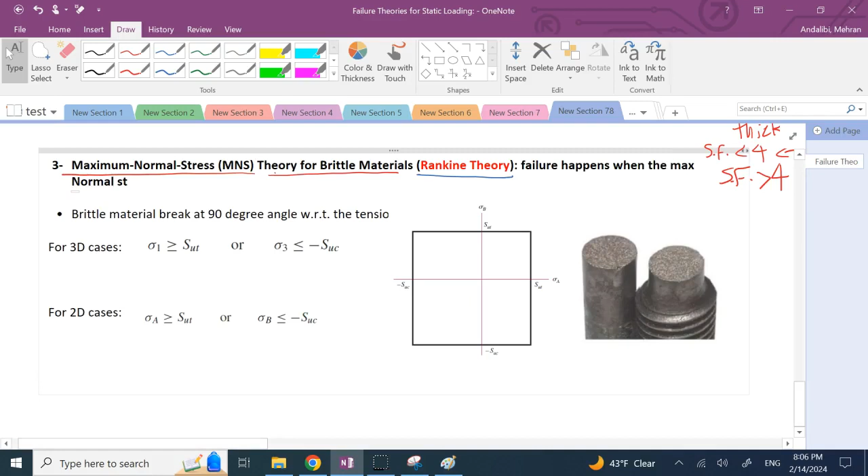Okay, the last part: the maximum normal stress, or MNS theory for brittle material, also known as the Rankine theory, the name of the person who developed it. It says that failure happens when the max normal stress exceeds the ultimate strength.

Let me just type the whole thing and get rid of this bold font. So the maximum, when the maximum normal stress exceeds the ultimate strength, then the material would fail. Again, this is for brittle material like cast iron, and it was observed that they break at 90 degrees with respect to the axis of tension. They break on these flat planes here where the normal stress becomes maximum.

Now, for the 2D case where you only have sigma A and sigma B and the third one is 0, if you assume sigma A is positive, then sigma A should be bigger than the ultimate strength for tension. And if sigma B is negative, then sigma B should be less than or equal to the maximum or ultimate strength in compression if it's negative. So in the negative area on the left side of this axis, as long as I'm to the right side of the maximum compression strength, with a negative sign because it's negative, as long as I stay on this side, I'm safe.

And for sigma A positive, as long as I stay to the left of this SUT, less than that, I'm safe. And if the sign switches, so sigma B becomes positive, then sigma B should be less than SUT, so I should fall below this region. And if your sigma A becomes negative, it should be in magnitude smaller, or with sign bigger, than negative SUC. So as long as you are inside this basically square, you should be fine, where the dimensions are SUT plus SUC, magnitude-wise.

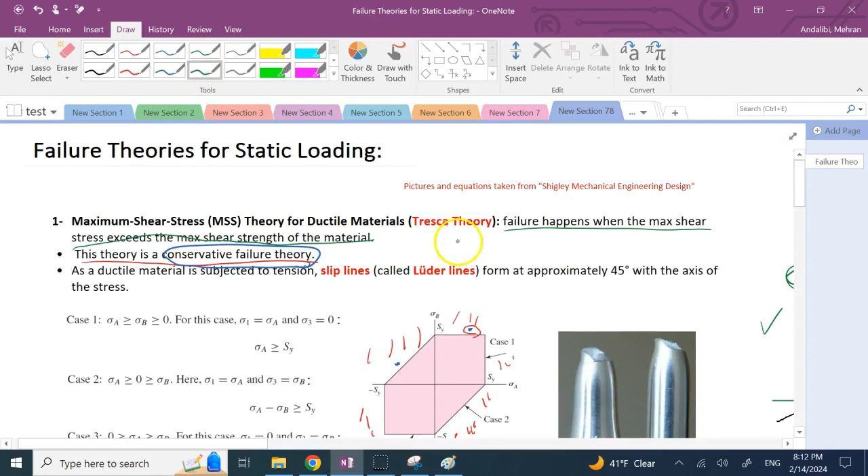And one last time, these three methods we discussed here are by no means exhaustive. There are more methods in the literature, but these three are the well-known ones. So I just explained them to you based on Mohr's circle and everything, and the derivation of them. And we went through one example to see how they are used.